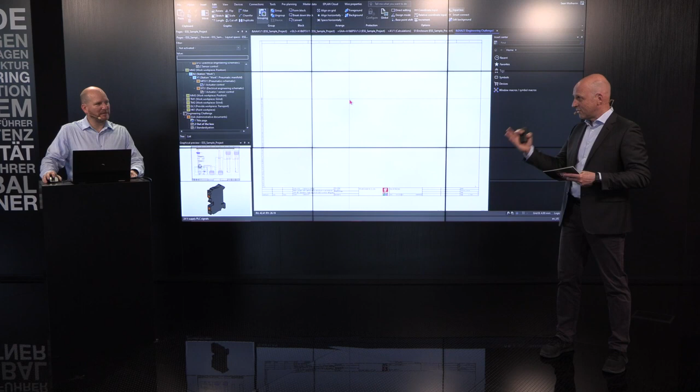No problem. Challenge accepted. So, in EPLAN, you have an environment that helps you create schematics efficiently and quickly. At a very minimum, we provide you with symbol libraries where you can access all of the various different symbols associated to electrical design and help you access them quickly.

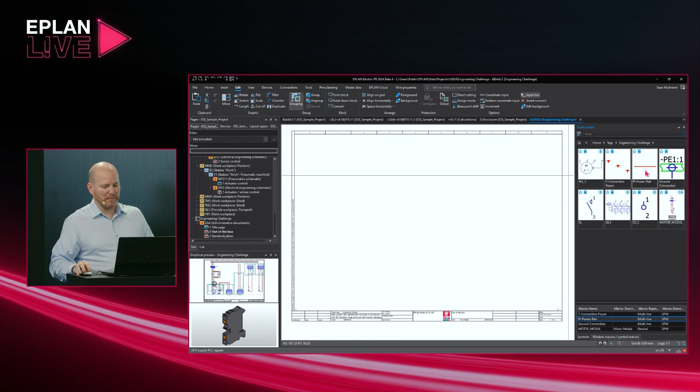Well, I thought you were going to give me a challenge, so I did a little bit of preparation up front. So I kind of collected the symbols that I'm going to use for this particular example in a collection of tags. So you can add tags to your symbols and group them together to help access them quicker. So let's start with a power rail, right? I'm just going to drag my power rail, and right there, if I hit X and Y, I can place them exactly where I need them, and I'm already started.

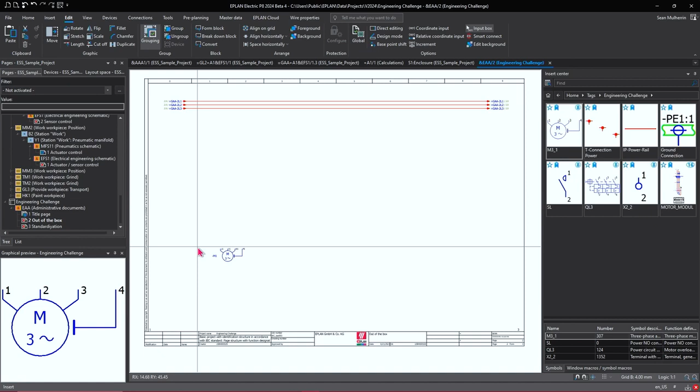Now let's create a motor control, right? Just a simple motor control application. So I'm just going to take my motor, drop it in here, and the first thing you notice is the motor is automatically tagged and labeled. And what I'm doing here is I'm not just placing graphics, I'm really placing data. So all of this data we can use and we can leverage to enhance our productivity at the end of the day. Then I'm going to connect this motor to my power rail.

So just simply here drag my T connections. Of course, I need to make sure that the motor is grounded. So I'm going to bring the ground back to the control cabinet. Just drop it in here. And now what's next? I need to make sure the motor doesn't blow up. So I'm just going to protect the motor with a protection device. And I just go to here, you can see, drag it across. And this is the fun part of the auto connecting lines. Seems such a mundane task that we just use every single day, but it really is powerful when you start putting components together.

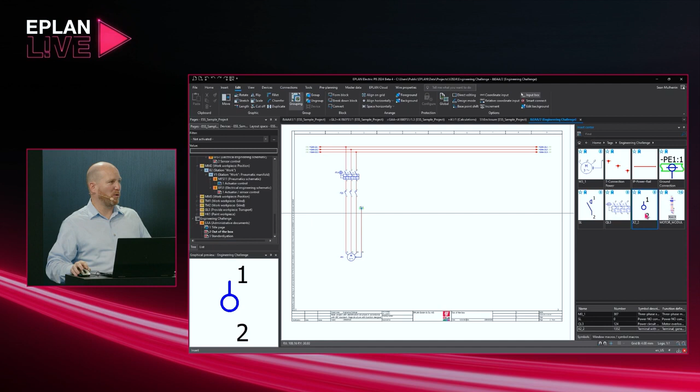Here I've got a contactor, and I'm just going to drag it across again and drop the contactor. And now I'm going from the cabinet, we talked about terminals, out to the field. So I'm going to drag a terminal strip across here. And of course, we need a cable. So I'm simply going to add a cable onto my drawing. And here we go. My first part of the design is completed. So here's a very simple motor starter circuit.

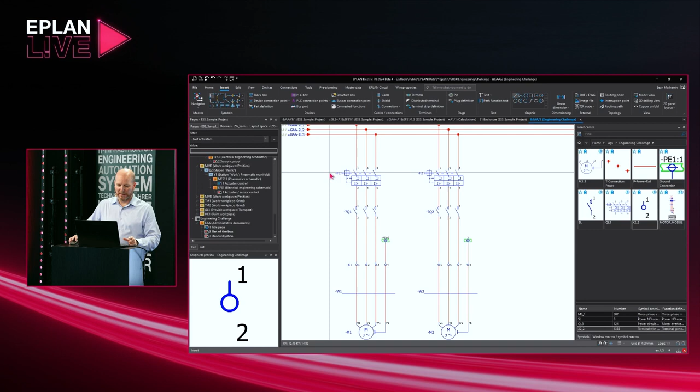But as you can see, it's easy to just drop the symbols and place them. And if you need two of them, well, just simply highlight it. I can just duplicate it, and then I can move it across. And one thing that you'll notice is everything gets tagged automatically. Even the terminal strip, if you look at the terminal strip, it goes sequentially through. It labels the cables. Everything's done. I really don't have to do much.

Cool. So did that pass the first challenge? Yeah. Okay. It was fast. It was pretty cool. And I think it perfectly shows, as you said, that this is not only graphics, but there's data behind it, and therefore the system can support with the numbering function or with the auto-connecting lines, etc., so that you get rid of these repetitive tasks and this mundane work.

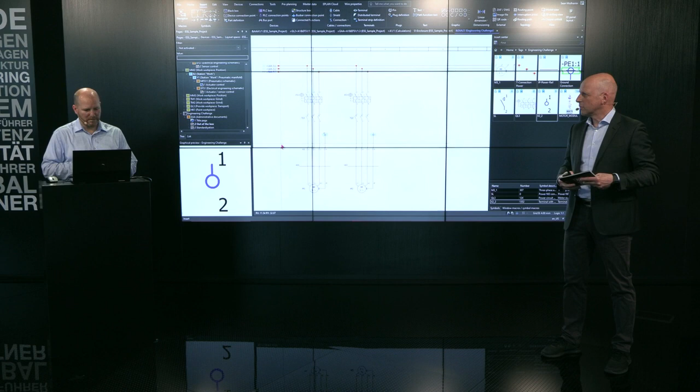Absolutely. So, okay. But I know, Sean, that you have more power to be even faster. Maybe let's just call it challenge number 2, be faster, and maybe this has something to do with standardization and templates? Okay, I will try. So let's just open up a new page.

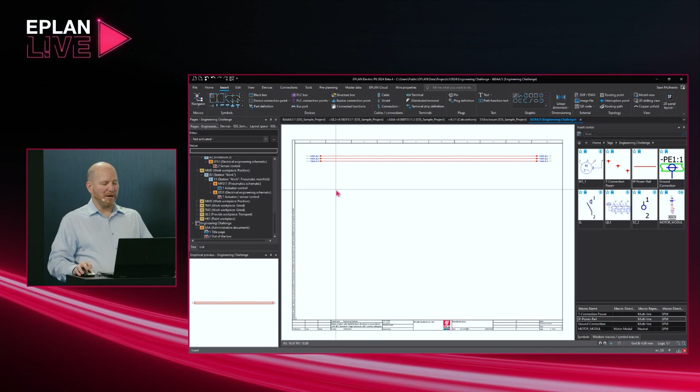I'm just going to call this page standardization, and let's see what we can do better this time. Okay. So let's start with a power rail. No matter what, I need my power to come into my page. Now, instead of placing symbols, I'm going to place a macro. What's a macro? It's like a template of a circuit, and that way you can easily drop that circuit onto the drawing. So here we've got a motor starter module.

So again, I'm going to position it in its default position. And now I'm going to hit the tab key, and look what's going to happen. It's going to give me different variations of that specific circuit. So I have everything that I need to design a control system right at the tip of my fingers. And all I need to do is simply navigate through those different variations and access them as needed.

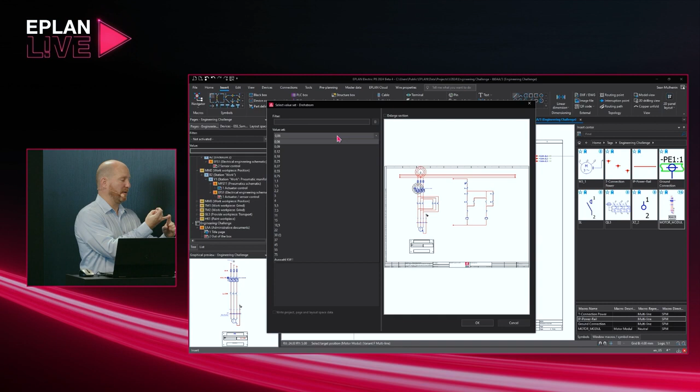So let's pick this variation, for example. I'm just going to drop it in. And now what comes up? Now it's even going to ask me, what size motor would you like? Because what happens when I change the size of the motor? I need a different power, I need a different protection device. The contactor size might change. The conductor cross-section might change. So a lot of different changes are happening just by changing this value.

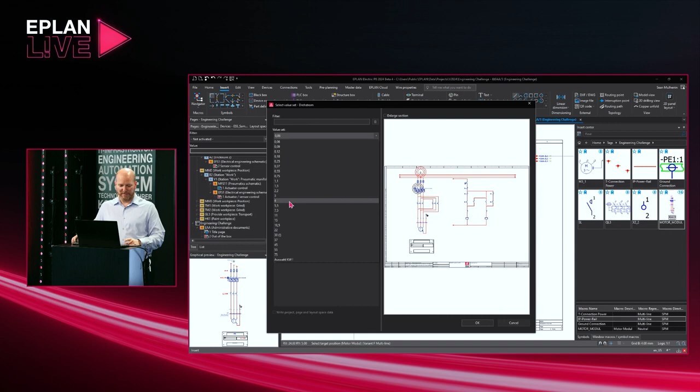So here, let's just select a 5.5 kilowatt motor for this application. And as you can see, automatically it sized the fuse, it sized my protection device, it sized my contactors, and all of the cross sections at the same time. So I hope I was even faster than before by just dropping it in, but also adding all of the engineering data behind it automatically. Cool.

Definitely faster, but now back to reality. What? You know that, as we already talked about this calculation topic, there's always the risk that the mechanical guys call you, you chose the 5.5 kilowatt motor, and they say, hey, we have to move bigger packages on a conveyor belt. We have to switch to 11 kilowatts, for example. So you're changing the length of the cable, and now you're changing the size of the motor as well?

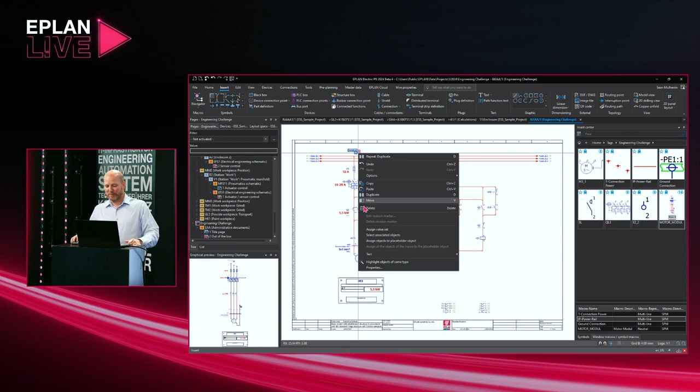Oh, exactly. Well, it's not a problem in EPLAN either, because you simply select this placeholder technology, and this placeholder technology carries all of those values that you need to switch. So by simply going from a 5.5 kilowatt, what did you say, 11? Yeah. So let's select an 11 kilowatt motor. You can see that the part numbers automatically get adjusted, and I really don't have a lot of work to do. It adapted all of my protection devices. It adapted my cross sections, and everything's done. So that was really not a lot of work. I need a better challenge than that.

Yeah. And now I'm with you. That is really fast and it's flexible as well. Because that means, again, when we think about libraries, I can put all this in a library, and this is somehow my know-how tank. Exactly. And that's part of the standardization process. You build up your standardized blocks, put them in a library, and then you just pull from that library to build your entire package efficiently and quickly. Cool, really cool. And that underlines the story, that it can be done step by step, and that it's really an approach to go further in that standardization topic with every project.

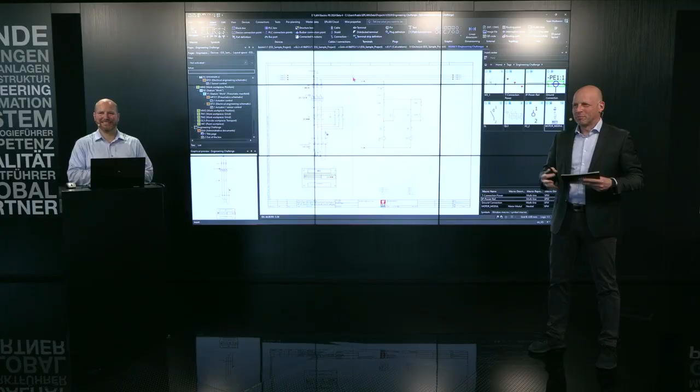Absolutely. Cool. But now, Sean, it's the final level. Let's do the final level, and give you the possibility to show that you can do it even faster. I can. Okay.

So now we're taking the standardization to the next level. As you can see, I took this motor and I placed it on a page. I would have to create another page, place another motor.

Took another page, place another motor. How about automating all of that? You like automation, Thomas? Of course. So let's go ahead and automate this process. And now we're going to talk about automated engineering.

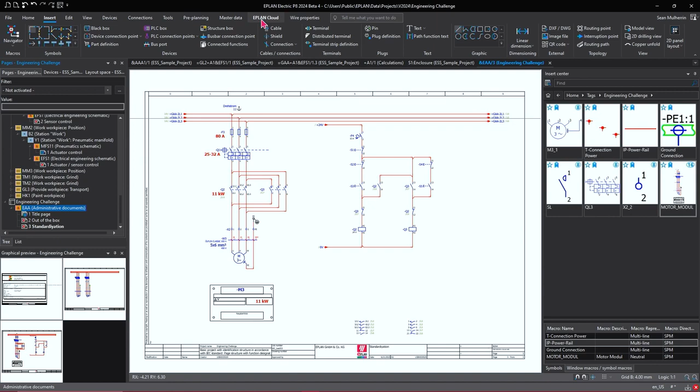It's really cool. But this is just the tip of the iceberg that I'm going to show you here, and how to automate it even further. So now let's go into the cloud. So I'm going to access in the cloud a tool which is free. It's called eBuild Free. And what is eBuild Free? eBuild is a collection of configurators that allow you to configure a project, click on a button, and generate schematics. So you really don't spend any time designing anymore. You really spend time configuring your project and then generating the results.

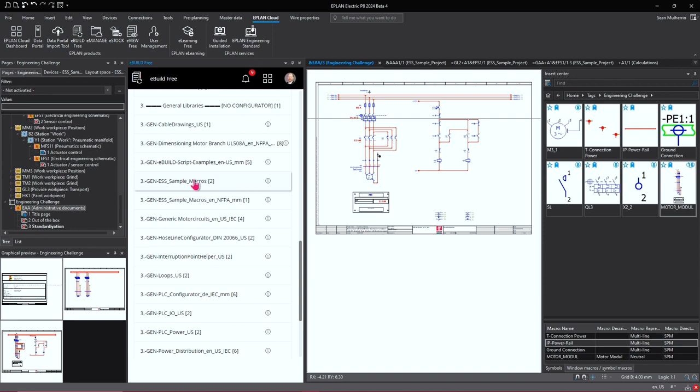So let's go ahead, and I've got a little example here, which is my sample macro project. I'm going to drop the pages in my engineering challenge project, and now I'm going to add a little bit of configuration, not too much. So here we're going to select a project with some variants. I need a measuring transducer. I need some lighting for my first enclosure. How many receptacles do we need? 1 or 2? Take 2. Let's take 2 for the first one.

Do we need light for the second enclosure? Better. Okay. And then how many sockets for that one? Just your choice. I'll take one. One for that, I think, is optional. E-stop, I don't think we need it in this one, and we're just going to control the motors with a reverse contactor. So there we have it. I just configured my project, and now let's see what happens.

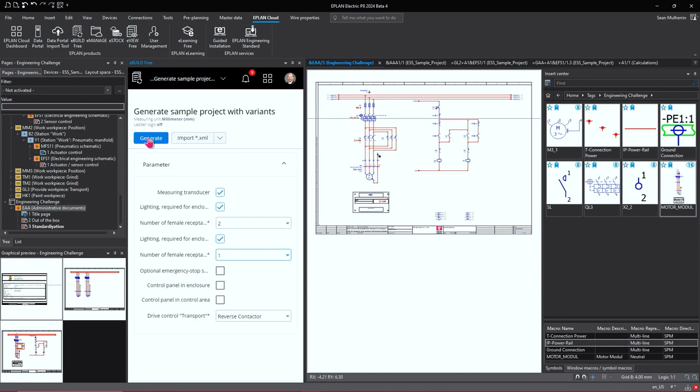So before, we were able to go and take some coffee, but did you start the timer? Yes, I did. And how long do you think it's going to take? It's now about 10 seconds. 10 seconds? Yeah. Okay, so we probably have a lot more. What? Done already? It's done. Cool. How many seconds? 13, right? 13, yeah. 13 seconds.

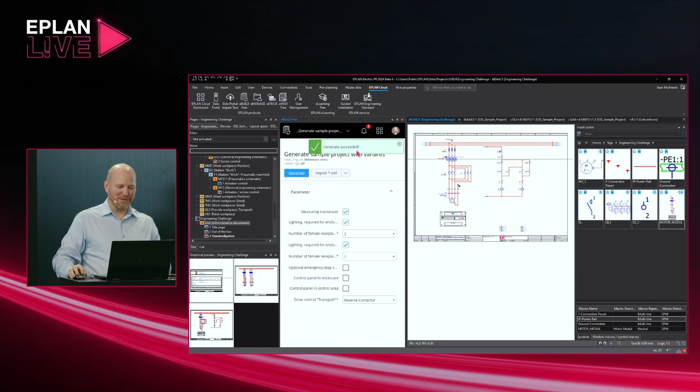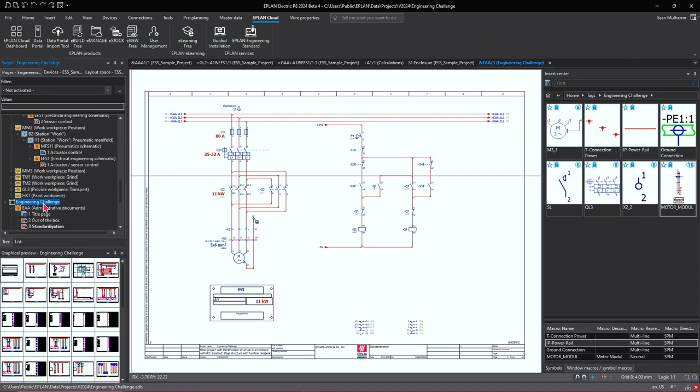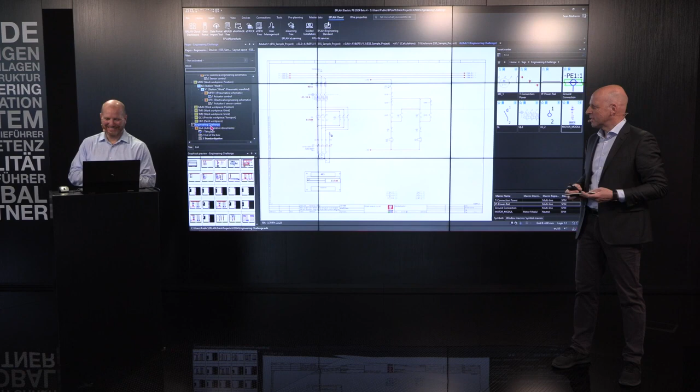So the step process is using an efficient tool like EPLAN, creating your standardized circuits, plugging all of that into a generator, and then leveraging that information to generate all of your documentation. So now I got nothing more to do. Yeah. That was awesome fast, Sean. Thank you very much for this very impressive presentation and for the stepwise approach that we start with symbols, already have the powerful functions in the software, and then really grow and talk about standardization and automation.